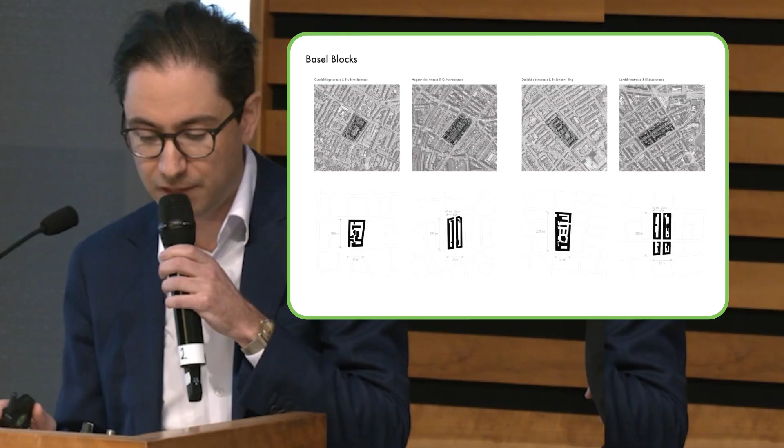So in considering which type of courtyard block would best adapt to Toronto's context, we actually found the Basel, Switzerland model quite suitable, as its block sizes and right-of-way widths could most easily be adapted to our Toronto context. So shown here are actually 4 different blocks in Basel, Switzerland, a city where my colleagues here actually lived for many years, working at one of the top architecture firms in the world.

So we looked at many precedent buildings, like this one in Basel by Buchner Bründler, and redrew them to study how they work. These buildings usually sit next to each other, creating a continuous street wall. Inside, they contain highly livable units with dual exposure to light and air. Typically, they're 6 stories. These buildings prioritize efficient layouts. They rely on minimal setbacks, single stair access, and reduced core sizes to maximize space.

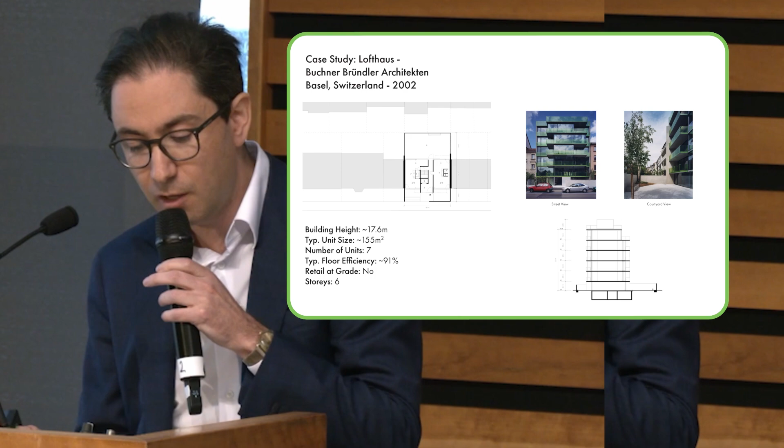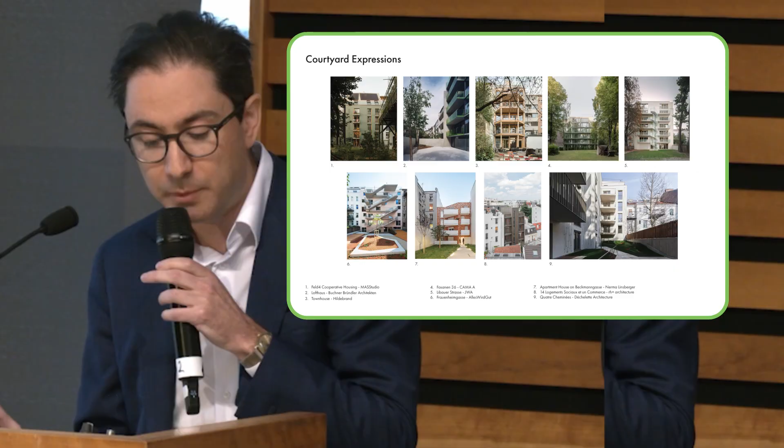We looked at how these precedent buildings engage with the courtyard and how the courtyard often functions as a kind of amenity space. Sometimes it's shared and sometimes it's actually private. We interviewed every single architect who designed the buildings in the images on the screen to find out how they create such high-quality housing, and we discovered so many things that are literally impossible to replicate in Toronto.

So we returned to Toronto, where we took 4 Toronto blocks and used them as a kind of baseline against which to compare and test the European courtyard block concept. All are located along major streets and will likely, due to recent changes in policy under EHON, be zoned for buildings up to 6 stories.

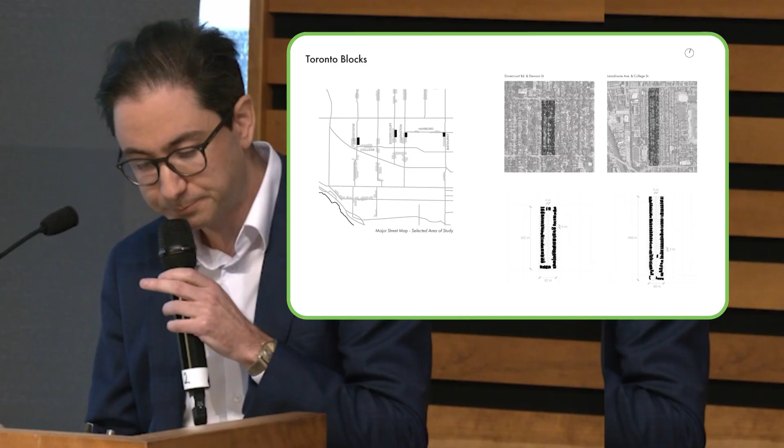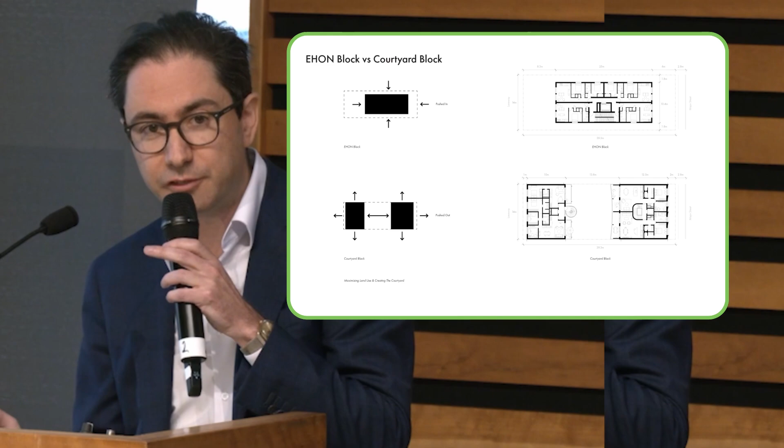So the key moment for us is where we did a kind of stress test of our own building design, of our own courtyard building design, and compared it against what we're calling an EHON building, and discovered that although these are new and improved policies we have, they're still extremely limiting to create buildings that are great and great cities. And so I'll pass it off to Francesco to take a deep dive into our design proposal.

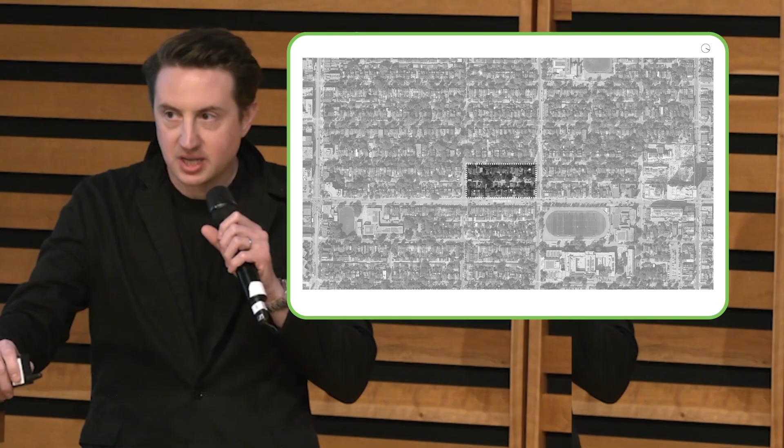Great, thanks, Gabriel. So starting right off with the design, this is the Toronto block that we chose to test the master planning concept of transporting the courtyard block, and we also used it to test our design proposal. It's located at Bathurst and Harbord. It's a typical Toronto block that has single-family detached and semi-detached homes with garages. It's divided by a lane, and it had the ideal dimensions to house a courtyard block for Toronto. Mainly, it's 82 meters wide by 172 meters long, with a 4-meter lane dividing it.

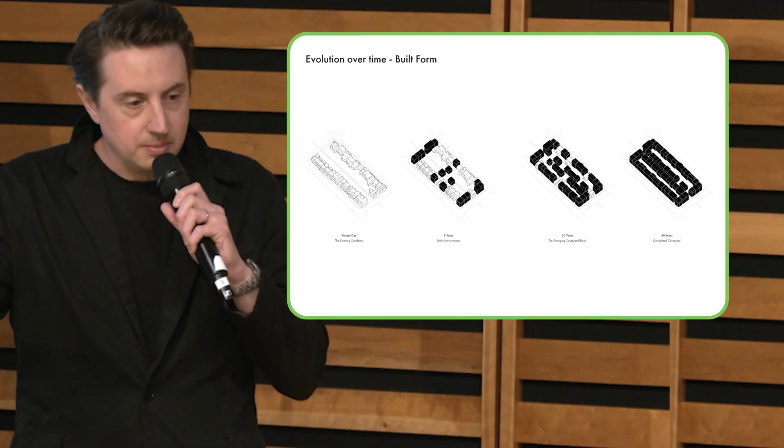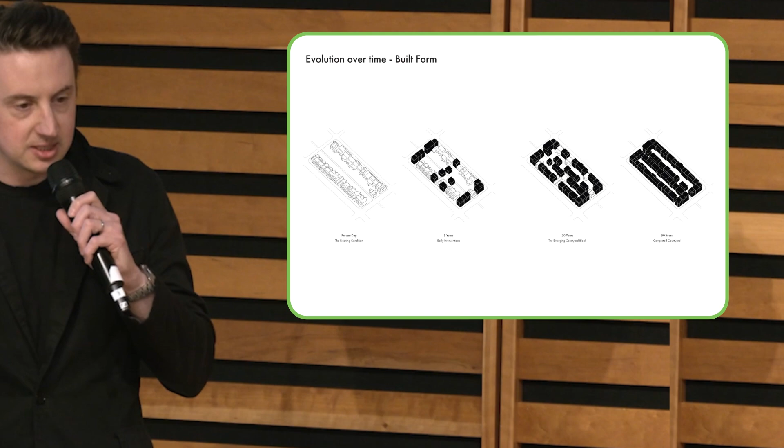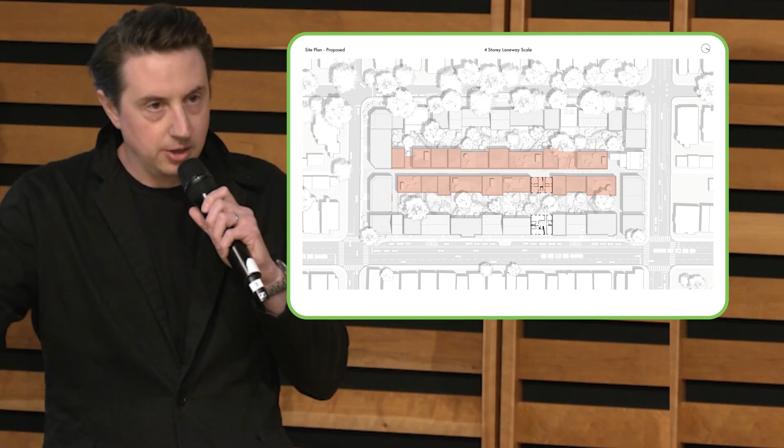From the very beginning, the master planning idea was really intended to be thought of as an incremental evolution over time. So starting on the left, you can see the existing urban fabric, and slowly, as things evolve, 2-by-2 buildings with higher density and greater height populate these sites, eventually creating 2 courtyard blocks for this specific Toronto site. So fast forward 35 to 40 years, this is what it would start looking like, with 6-story buildings located around the perimeter, along the streets, and with 4-story lower buildings located along the laneway, coming together to form 2 distinct courtyard blocks, each with their own landscape clearly defined within them.

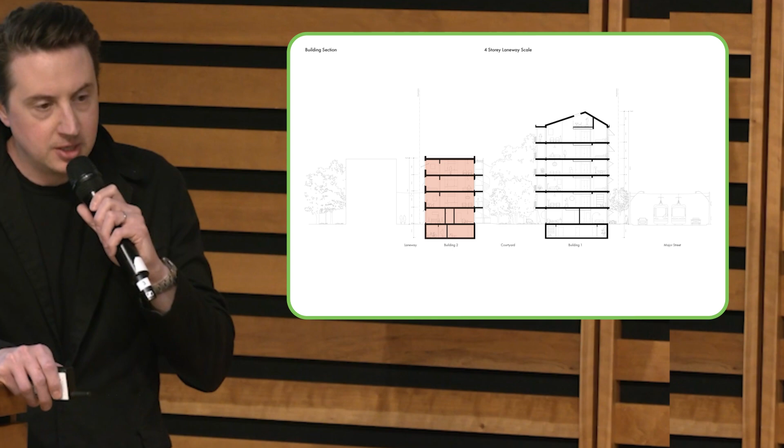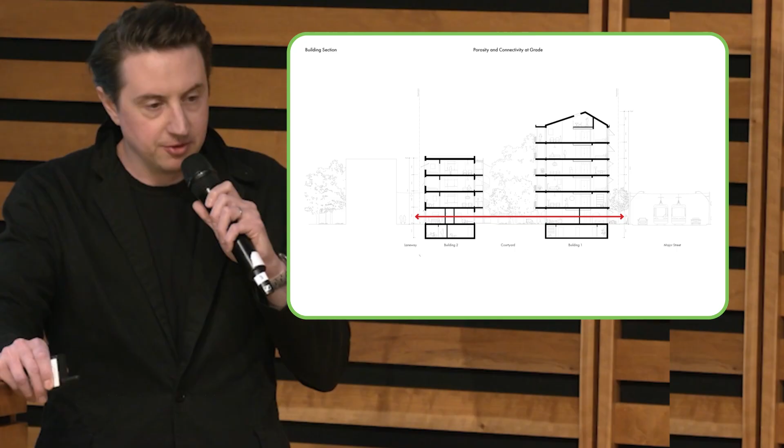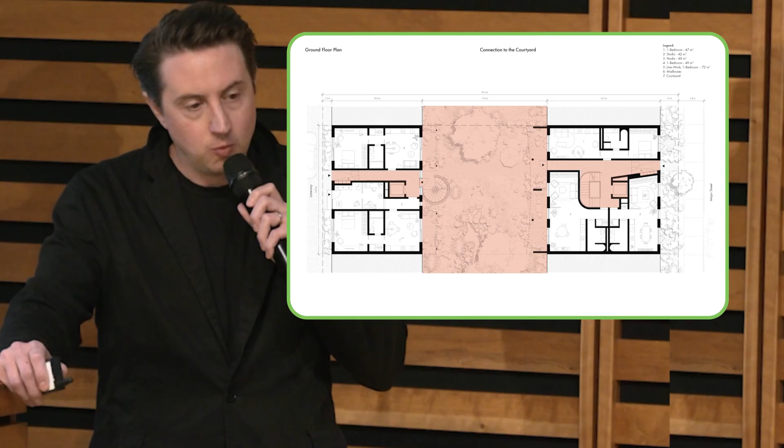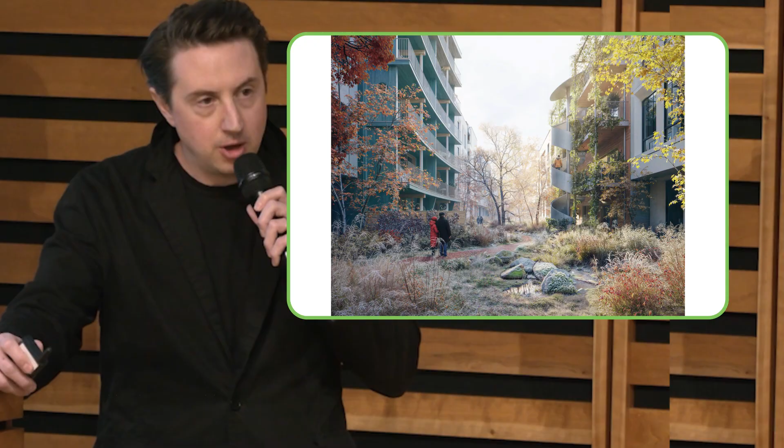The ground floor plan, which is greatly characterized by the idea of maximizing at-grade units, is strongly connected to the courtyard and to the landscape. It was designed in conjunction with Marc Ryan at Public Work. It's an anchoring space and one that was very much conceived of evolving incrementally over time, like the built form itself. So on day 1, it's imagined really as an island onto itself, where more intimate outdoor patios are carved out of the landscape for the at-grade units, and the lush vegetation provides relief for the units above. While over time, as more and more buildings fill this courtyard block, the landscape could expand and become essentially a courtyard-wide amenity for everybody to share.

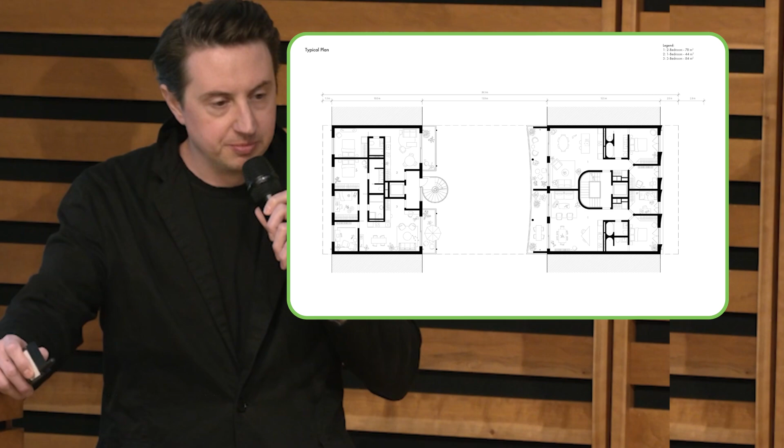Moving up to a typical floor plate, they're characterized by shallow floor plate depths. The laneway building on the left is 10 meters deep. The front major street building is about 12.5 meters deep, and this allows for 2 units per floor plate, as is typical in Europe of buildings at this scale, and really allows for a through unit configuration with access to daylight and ventilation on 2 facades.

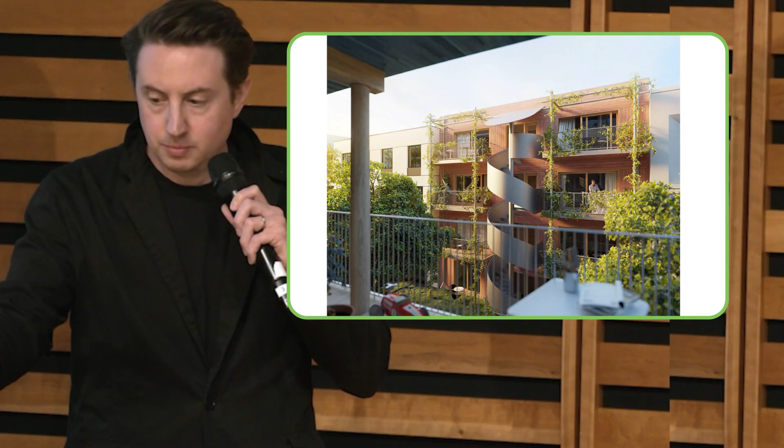Okay, and the living spaces of the units are oriented towards the courtyards. So this is looking from the street side building back towards the laneway. And the bedrooms instead are off of the street and the laneway with either Juliet balconies or punched windows to provide ample ventilation and daylight.

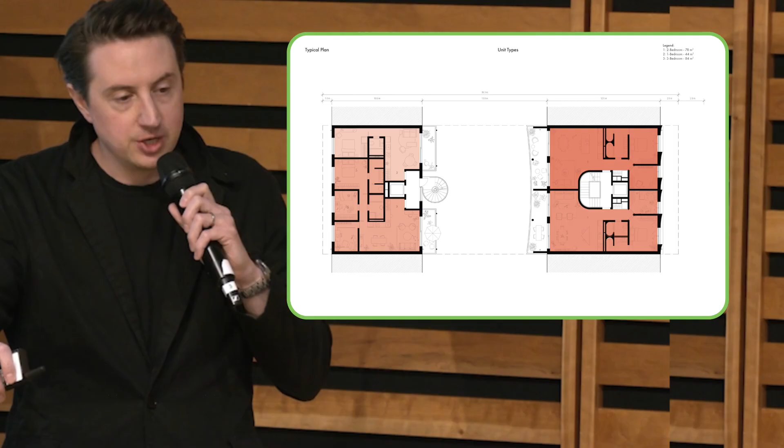We tested numerous unit configurations and layouts. On the laneway side, we landed on a 3-bedroom and a 1-bedroom as a typical configuration. And on the right, on the larger building, we did a 2-bedroom configuration as a standard, again, with the bedrooms off the major street and the living spaces off the courtyard.

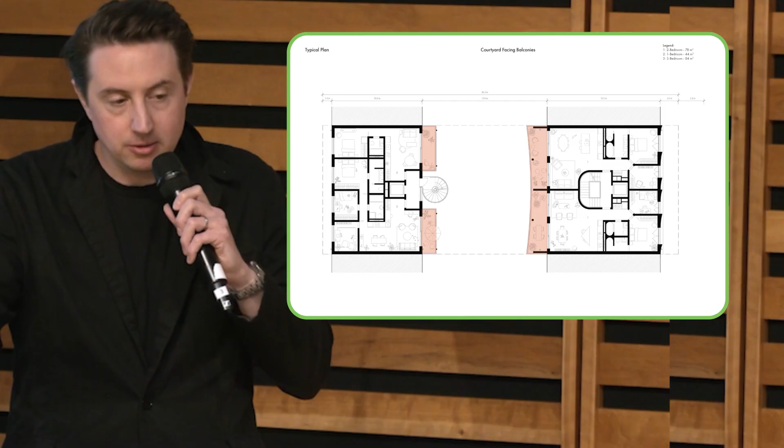And of course, given the scale of these buildings, balconies are in fact fabulous places. They're not windswept, they're places you want to be, and there's an extension of the living space onto these balconies, which create a more intimate experience of the outdoors compared to the more communal landscape of the courtyard below.

I'll pass it on to Alaris Rogers to talk about the big 3. Thank you. So I'm here to deliver the bad news, which is that none of this is actually possible in Toronto today. So our scheme violates all sorts of zoning bylaws, building codes, as well as even cultural expectations about how we should live or how the city should operate.

So what we've done in our research is identify 3 key categories that identify changes needed in order to overcome the obstacles to this type of missing middle construction. We call them the big 3, and the first of the 3 is probably the most straightforward category, called setbacks.

In this case, we have a typical EHON building on the left side, which is probably the best case scenario you could get, building with the major street study guidelines. It essentially looks like a single-family house on steroids, 6 stories tall, but still functioning as an island in the middle of the lot, neither engaging with the street nor the laneway behind. And you also have significant side yard setbacks. What do you really do with these side yards?

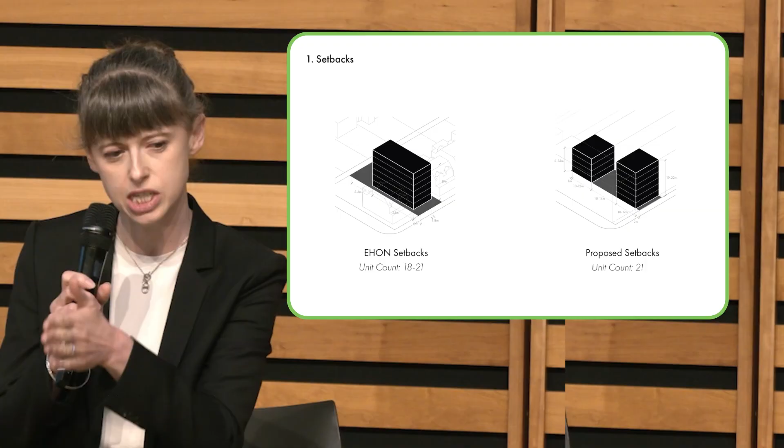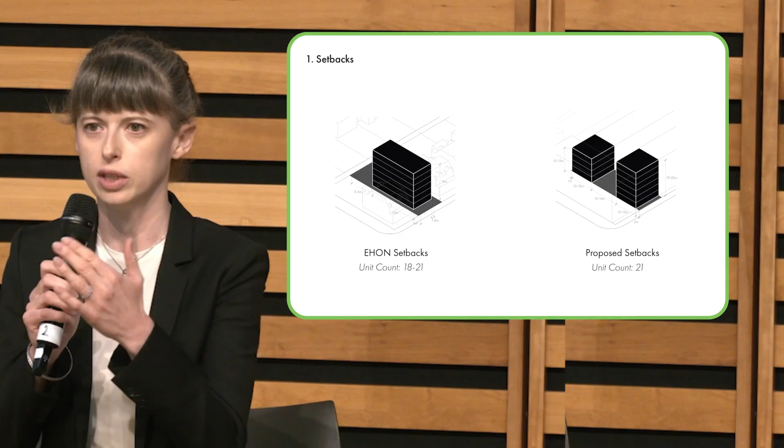No one knows. So we're instead proposing 0 side yard setback in order to really create the consistent street wall that both Francesco and Gabriel mentioned, as well as very reduced front and rear yard setbacks, allowing the building to really get up close to the street, close to the laneway, while still allowing for some minor setbacks to increase the size of the laneway and also allow for vegetation and planting along the street. But that gives much more space to the courtyard, which is where we think we need it.

The next overarching big 3 category we're calling maximizing efficiency, and this is really about trimming space out of the building that is maybe not so useful, so that we could return that space to what we really want, which is space for living. So we see the core as really ripe for pruning.

So on the left, you have diagrams contrasting a typical European style core with a North American style core for a 6-story building. And as you can see, the core on the left, the European, is less than half the size of our Toronto cores. So that's a considerable space savings right there, and that's largely due to the fact that their elevator is about half the size of ours, and about a third of the cost, and they also rely primarily on single stairs, which I know is going to be a big topic today.

So that's what we're proposing for our building, a single stair, which is also open on the corridor, another violation of codes. But in the image, as you can see on the right, we believe that really creates a very attractive stair people are more likely to use, and it kind of fosters a community around that stair.

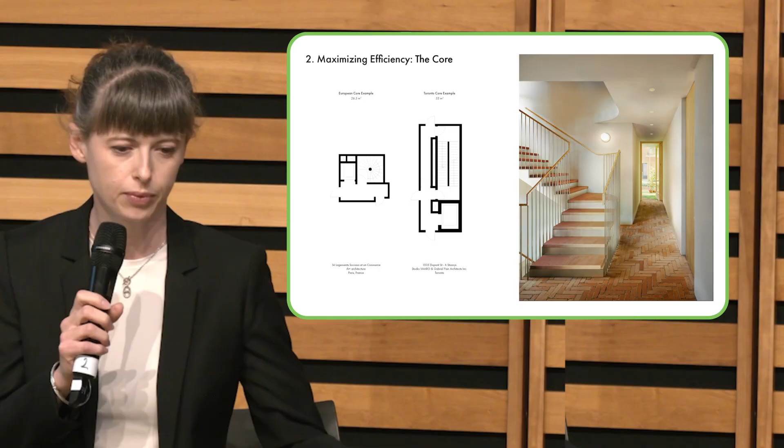So moving on, another area where we'd love to see reduction in area occupied within buildings is in waste storage and other amenities. So using waste specifically as an example, waste storage rooms typically take up a lot of space inside and out on the ground floors of these types of housing. And we'd love to see that space returned to the units, or potentially, as in the diagram on the lower left side, to commercial space instead.

And what we propose is actually to either reduce the space and move waste to the basement, or even better, move it into the public realm. Right now, waste rooms are decentralized, placed in each individual apartment building.

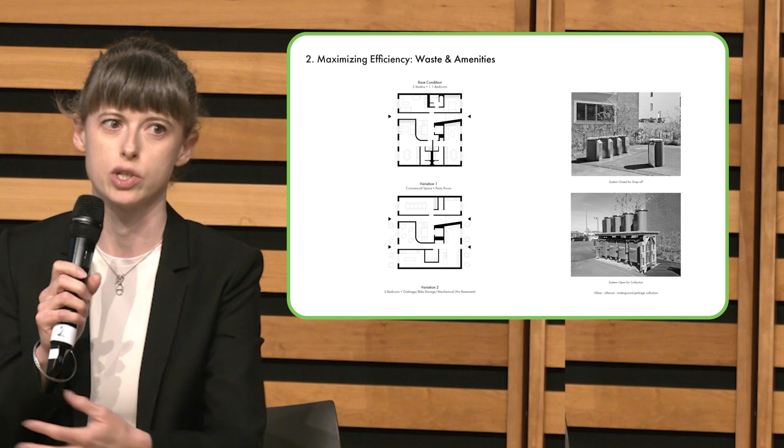We'd love to see it centralized along the street. What you can see on the right-hand side is a typical European centralized garbage solution. It looks like municipal bins, but actually conceals underground collection bins, which the street trucks can just pick up as needed.

So the next and final big category of the big three is low tech. It's something that is talked about quite commonly in Europe. Essentially, in the same way that maximizing efficiency advocated for reducing area of certain elements inside the building, low tech calls for paring down and simplifying buildings by using fewer and more sustainable materials. Low tech does not mean no tech, but rather an efficient and sufficient use of technology within buildings, relying more on passive systems rather than active mechanical and technological systems.

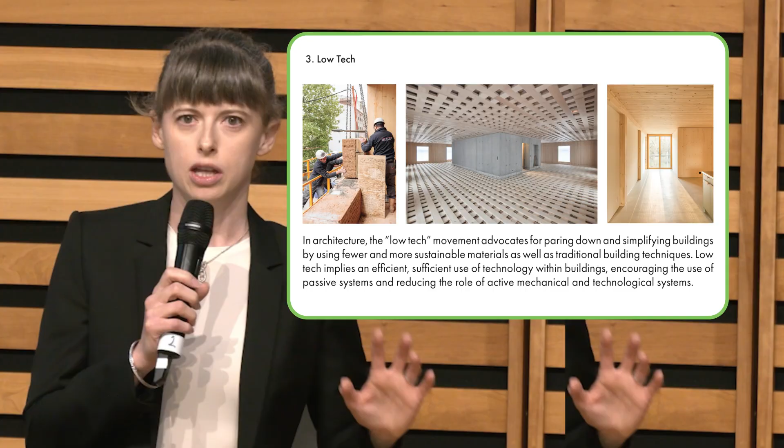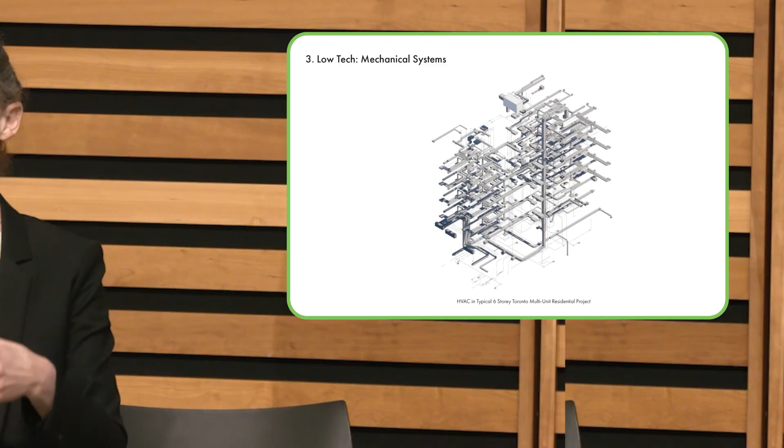So that has a lot to do with our principles of sustainability for the building, but obviously a lot to do with the mechanical systems themselves. What you see here is a typical mechanical system for a 6-story building in Toronto. Incredibly complex, requires a lot of coordination. It also has a spatial impact inside of the units themselves, requiring bulkheads and things like that, which as architects, we're trying to avoid, right?

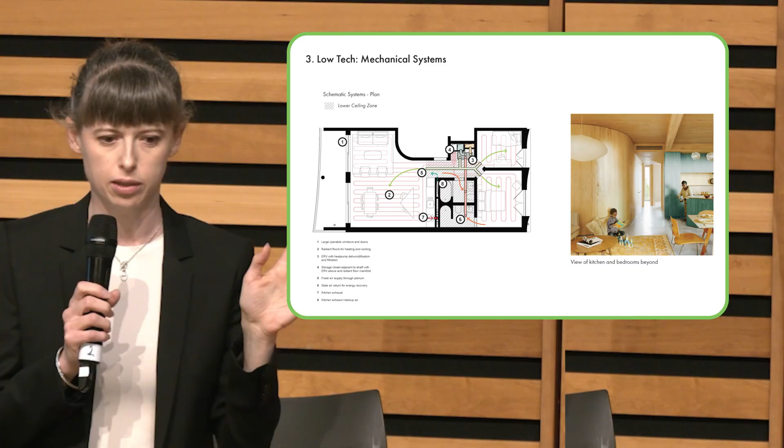So what we propose instead is a much smaller footprint HVAC system, which again is centralized above the entry and washroom to each unit. The system would rely first and foremost on passive heating, cooling, ventilation, and would kick in just when those are no longer sufficient. As you can see in the image on the right, it's very well integrated in this drop ceiling, concealed within the depth of the beams. So super minimal footprint, no ducts, and a lot less complexity and coordination required.

And lastly, within the low-tech category, we put fire protection, because typically in mass timber buildings, which is what we're proposing for the structure of our project, within Ontario you need to clad most of that wood in drywall, and it also requires sprinklers. We were really inspired when we saw some of these Swiss precedents, and we also spoke with Swiss fire engineers. There, they use more of a performance-based fire protection framework in which there are trade-offs.

So in order to have very little encapsulation of the CLT and no sprinklers, you just need a high fire rating between buildings. That was something we would love to see here in Ontario, more of a performance-based system, and that's what we're proposing in our building. No sprinklers, the CLT is exposed.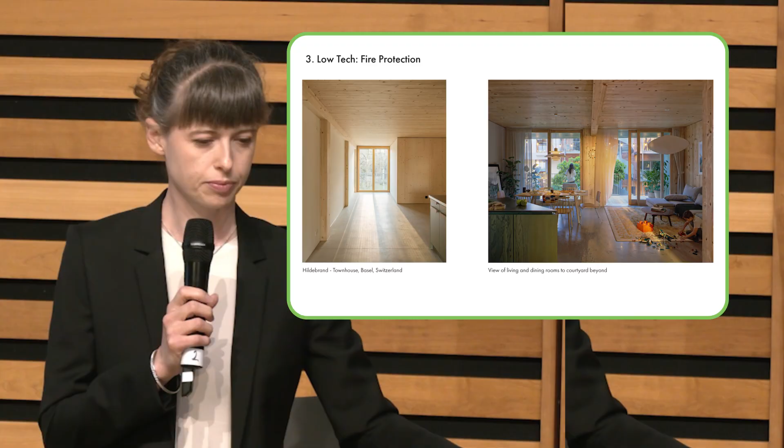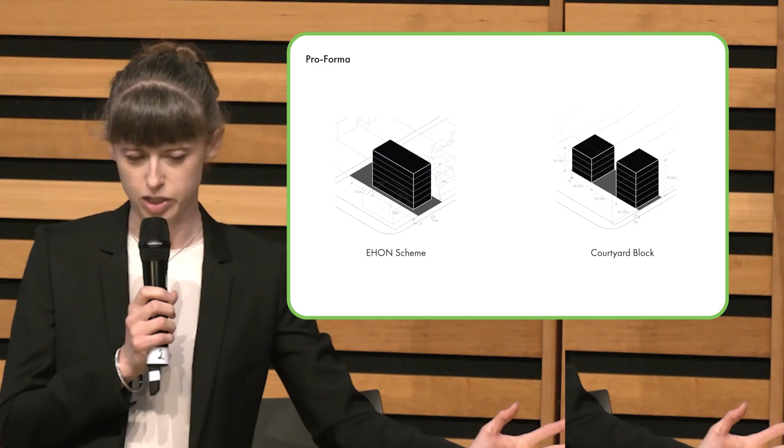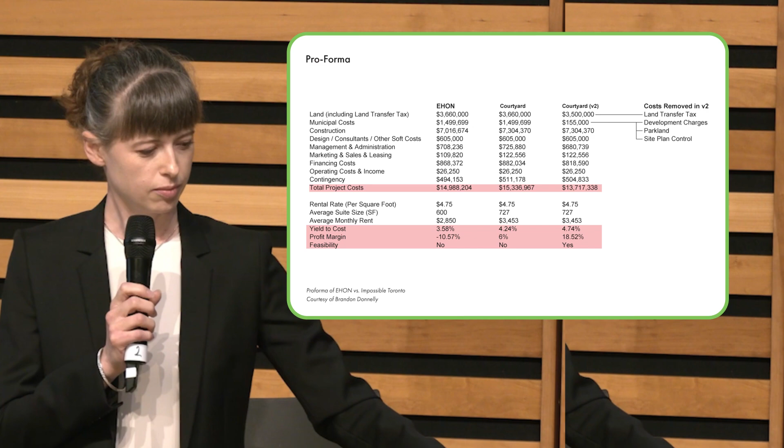Okay, and last but not least, kind of a big one, the pro forma. Even if we could get beyond all these regulatory hurdles that I've just outlined, the numbers still need to work, right? So Brandon Donnelly of Globizen ran a couple of pro formas for us, comparing the numbers for an EHON scheme and a courtyard block. And sadly, the slide is not working. Oh, there we go. Sadly, neither works.

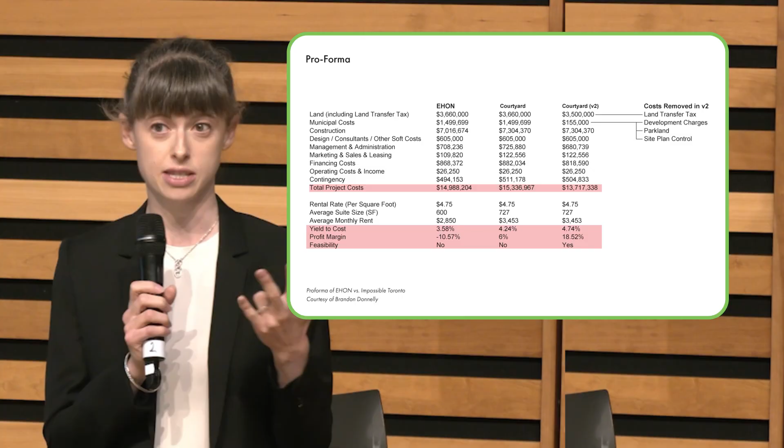If you look at the two columns on the left, it's possibly because we have a very expensive site downtown, but I think that's exactly where you want this kind of density. Brandon did find that as soon as you remove about $1.5 million from the budget, which could be accounted for in land transfer tax, development charges, parkland fees, and site plan control, then the numbers work. So it's clear that something big has got to give if we want to see any of this kind of construction in the near future in Toronto.

Okay, so just to wrap it up, as Gabriel started off by saying, we got into this project asking, why can't we have this at home? I think we now understand the many factors that stand between us and the courtyard blocks. But it also raised quite a few new questions for us. What we know for sure is that we would love to see urban policies in the city that not only increase density, but also push for more vibrant, higher quality housing.